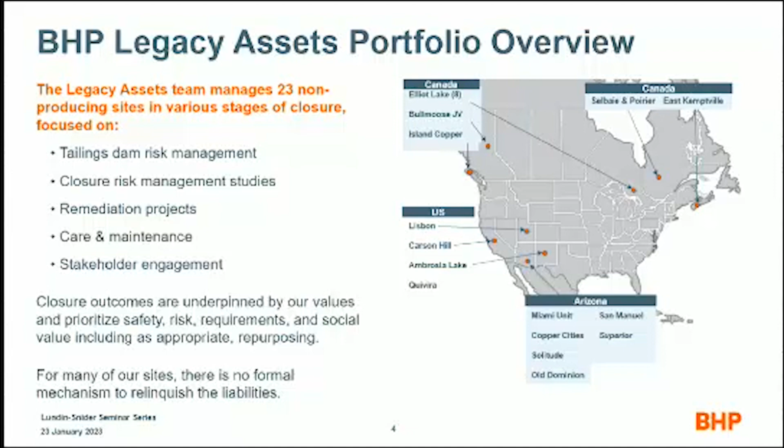This gives you an idea of the expanse of some of BHP's legacy assets. We go coast to coast from the arid southwest of the US. We have sites, you may be familiar with San Manuel Mine or some of the mines in Globe-Miami. We operate some of those. We also have sites in northern Ontario, in Elliot Lake, where we've got a lot of water to deal with.

So we've got different environments that we're working in, as well as different climatic settings, ecosystems, hydrologic settings, and regulatory jurisdictions. Regulations for mining in Arizona look very different than regulations for mining in Canada. And regulations for mining uranium look very different than regulations for mining copper. And we're navigating all of these different sites and trying to do the right thing.

They are also in varying stages of closure. Some of our sites were closed 20 years ago in what was at the time considered world-class closure. There have been multiple learnings that we've shared in the past around these sites and the success stories. We haven't always shared some of our lessons learned, and I'm going to do a little bit of that today. We also have sites that, while we're managing the potential for contamination and the geotechnical risks, haven't necessarily been closed at all. We haven't taken closure activities.

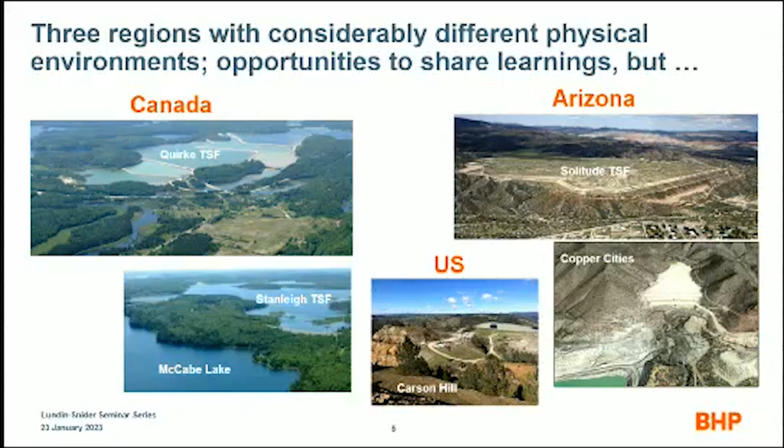Speaking of water, so in the past, closure in the mining industry has really been around meeting regulatory requirements. What's the minimum level of stuff that we can do to meet the regulatory requirements, keep everybody happy for the lowest cost?

And looking at closure from a discounted value. You start a mine, you say, oh, closure is going to happen in 100 years. The net present value of that is nothing. I can do whatever I want at closure. It doesn't matter. Trying to change that narrative and say, we as legacy assets aren't operating 100 years down the road. We're operating now. So all of that stuff that people wrote off as NPV 20, 30 years ago, we're having to manage now. And how do you take those lessons that we're learning and take them back into operations and lower those costs?

The next step in closure maturity, away from just meeting regulatory requirements, is managing risk. How can we do closure to manage risk in the right way? We have over 50 what BHP calls material risks within legacy assets, and they can be split into several categories. We deal with risks around water, tailings, covers, communities, soil, infrastructure, fall of ground, tailings facilities, all of that stuff.

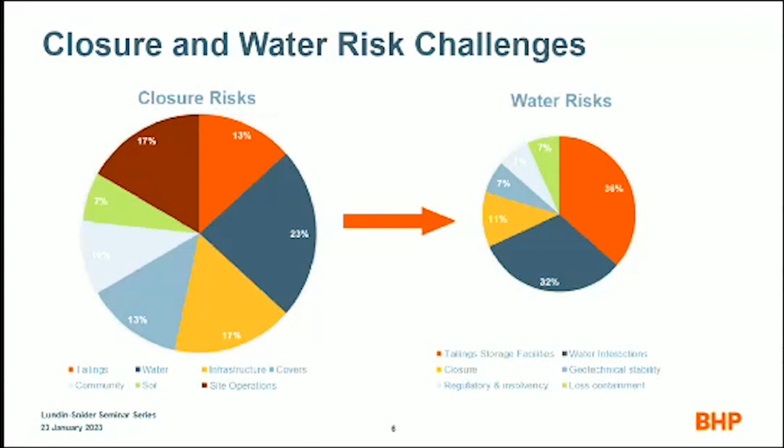As we progress through closure maturity, we would like to change that conversation so that it's not just about managing risk at our sites, but how are we also adding value? And maybe that's not an economic value. Instead, we're looking at positive contributions through things like environment. How can we use our closed sites to increase the biodiversity in areas? How can we use tailings facilities to contribute to decarbonization and carbon sequestration? How can we provide a benefit or a social value to the community so that they can go out and do something with these sites at the end of their life? So we're not just looking at these as a cost to the company, we're looking at them as a benefit, just not necessarily a hard cash benefit.

So today, BHP is focused on achieving optimized closure outcomes on a fit-for-purpose, site-by-site basis. We've got a lot of competing interests. We've got obligations, BHP's value commitments, partner and stakeholder expectations, and of course there's cost, right? We always have to consider cost because we are a mining company. We're looking at how to grow and change our closure as new knowledge comes in, bringing a wide array of subject matter experts into the closure planning process, and then make closure decisions based on BHP's appetite for risk and their appetite for contribution to social value.

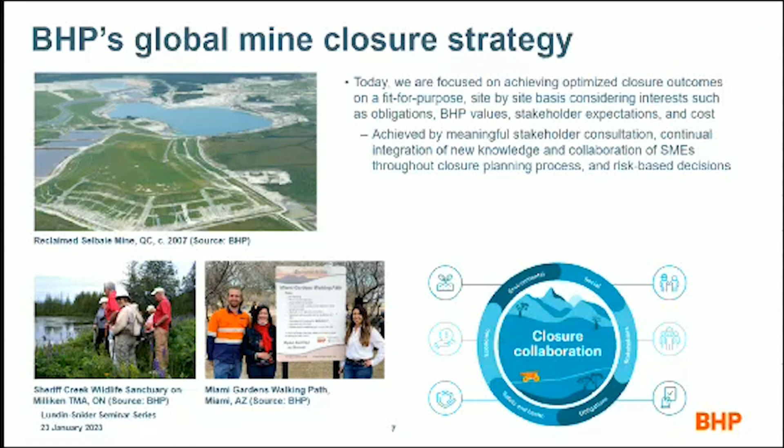A couple of change stories before we get into the lessons learned. This gets back to how things have been managed in the past, and as new things come to light, how we change. For sites in long-term care, we need to be great managers of change because it will come to us. So we have to adapt for changing climatic conditions, events like tailings dam failures that bring refinements to best practices, changes in best practice for closure, stability, geochemistry, fate and transport modeling. And with a large legacy assets portfolio, we're working to prioritize what's required, decide where the greatest risks lie and how to manage those risks at our sites.

These are a couple of examples of things that we've done in the last little while. The Miami Avenue tailings facility was in Globe-Miami, Arizona. It was legacy assets' only extreme consequence tailings facility. It was a very small one. It was only operated for 2 years, from 1920 to 1921.

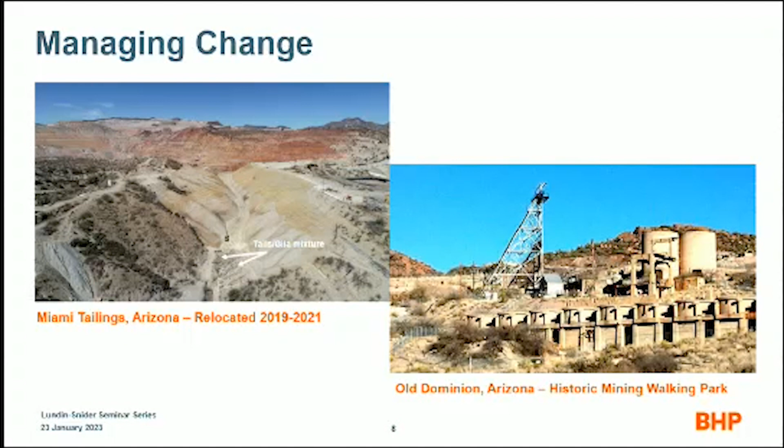So, common attributes of varying closure outcomes. What makes for good outcomes and what makes for not as good outcomes? As we optimized development and closure of some sites in the past, we've not necessarily come to the right decisions in terms of post-operation life, when we apply a modern set of optics, right? So with the value of hindsight, I'm going to present a couple of examples of some good closure outcomes and some not so good closure outcomes.

The good outcomes tend to have focused on long-term thinking, robust science, good stakeholder engagement, and we generally have greater success when we trial and evaluate design concepts in the field prior to full implementation. Poor outcomes have resulted from trying to achieve short-term goals of regulatory compliance, lack of consideration for site-specific conditions, particularly climatic and hydrogeologic setting, and isolated decision-making. Decision-making in a silo, where you're only looking at one piece of the puzzle, so it's inconsistent with the desires or values of other parts of the business or external communities.

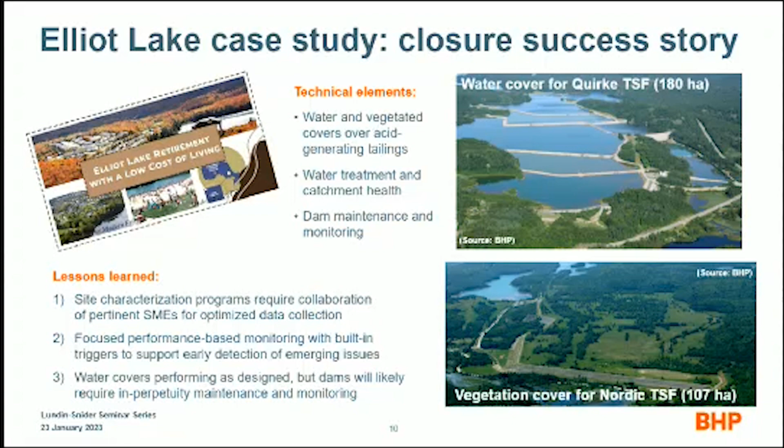And then this is a site that didn't have so good a story as Elliot Lake. As a little bit of background, this is our Selbaie Mine site in northwestern Quebec. It's about 130 kilometers from the nearest community, so this one's an effort to get to. It is kind of out in the middle of the bush. It's very cold.

Semi-humid. They've said relatively cold here, but for Tucson, it's very cold. They've got an average temperature of 0 degrees Celsius, so yeah, I'm gonna go with cold. They get 850 millimeters of precipitation and 590 millimeters of evaporation.

Selbaie was a surface and underground copper zinc mine that operated from 1981 to 2004. The site development included an open pit, 18 million meters cubed of potentially acid-generating tailings stored in an unlined above-ground facility, and 16 million cubic meters of potentially acid-generating waste rock that was also stored in an unlined above-ground facility.

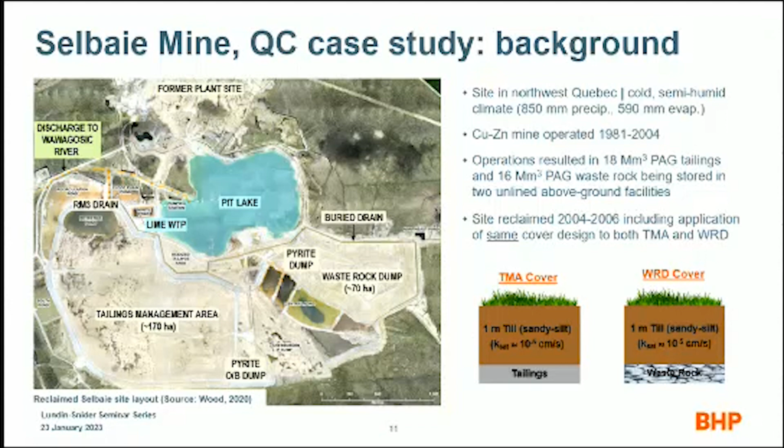From a cover perspective, there's a couple of different issues here. The local till material was too permeable to act as an effective hydraulic barrier, and the same cover was used for both facilities with different design objectives. One was to prevent infiltration, and one was to allow infiltration into the mass. So you're not looking at actual site-specific, facility-specific design objectives.

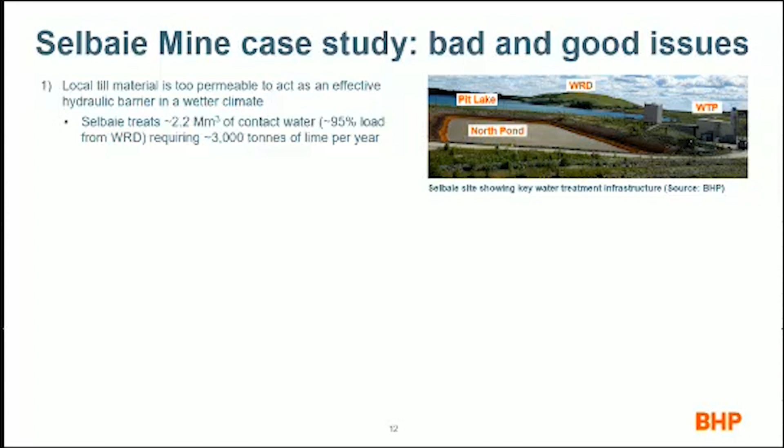Well, guess what? We currently have a lot of acid seepage emanating from the waste rock pile. On average, we treat about 2.2 million meters cubed of contact water, requiring 3,000 tons of lime per year to be shipped to the site. The lime that's used to treat the water at Selbaie comes from more than an 8-hour drive away in our Elliot Lake sites. So it is a substantial addition and operating issue for us.

Once the water is treated, it's directed into the pit lake for polishing prior to discharge to the environment. The good news is that the pit lake has 300 years worth of sludge storage. The bad news is that without remedial measures to stop the acid generation of the waste rock dump, we could potentially be treating water for the next 800 years.

The second issue with the waste rock dump is that the landform wasn't thought through. There is a flat plateau on the top that does not actually shed water well. Instead of shedding water via the landform, they shed water to drainages, chimney drains essentially, that were built into the waste rock dump cover, and then shed down into a buried pipe system.

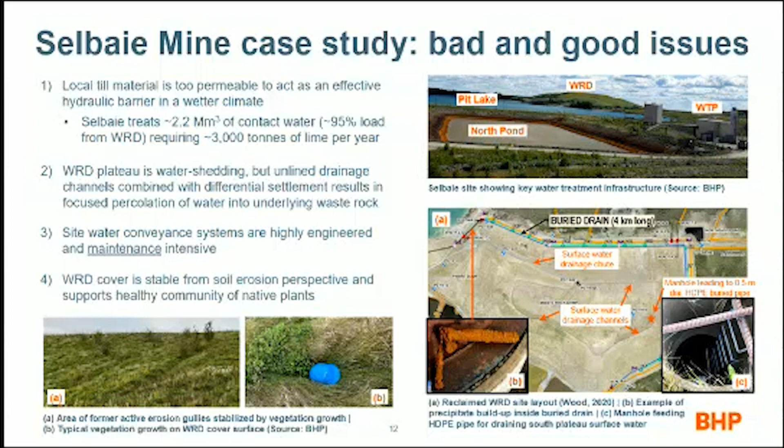One good aspect of the reclaimed waste rock pile is that while the cover was initially prone to rilling and gullying, the coarse fraction of the till material combined with the root mass of the native grasses has worked to stabilize the cover surface. So we're not getting a lot of rilling or erosion. We've got very good establishment of vegetation on top of the waste rock dump. So it did the job of at least stopping surface water from contacting the potentially acid-generating species.

We are starting to get woody species beginning to naturally colonize the surface, particularly where we have water ponding on the surface of the facility.

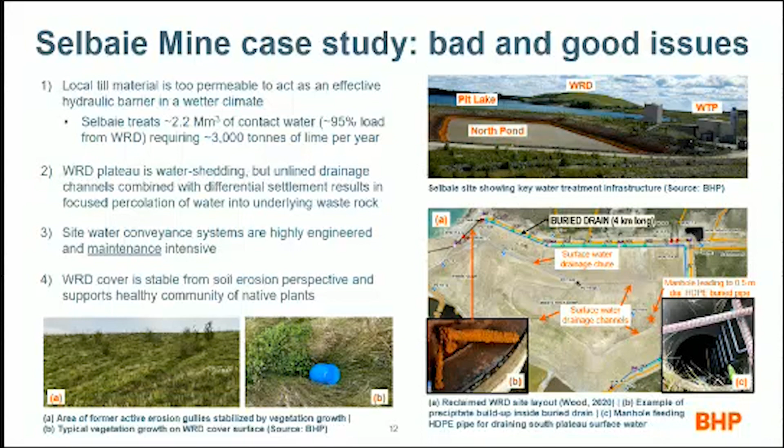So, some lessons learned about Selbaie. From a cover design perspective, there are a couple of issues. Anyway, moving on, sorry. We've learned a couple of lessons from Selbaie over the last 15 years of post-closure care and maintenance, and of course, hindsight's always 20/20. But what could have been done different 20 years ago when this closure was constructed?

Number one, there's a potential for the plateau runoff, the landform, to look differently, to shed water better, and not to rely on chimney drains and other types of conveyance that are prone to blockage and precipitation and percolation. There's always an issue whenever you're working with high TDS solutions of precipitation, or even non-high TDS solutions.

Whenever you're building something that's buried, don't rely on it staying open. I think that is one of the biggest messages; it will require ongoing, constant maintenance. If you can design something that cannot be blocked, rely on that for conveyance of solutions.

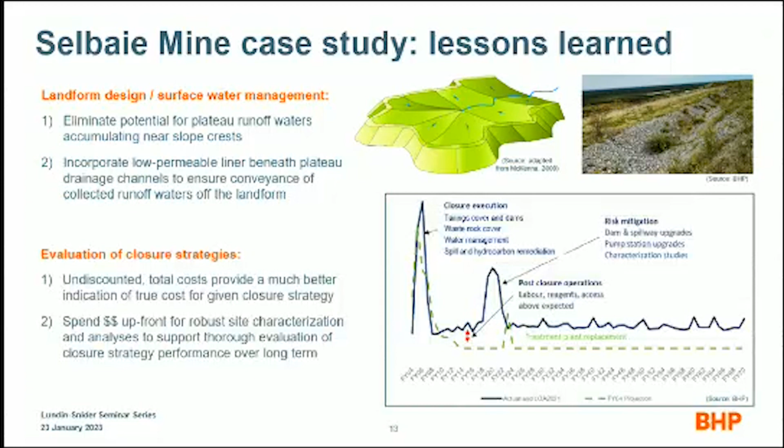When we go to the effort of shedding incident precipitation off of a flat plateau, we want to make sure that the diverted water is conveyed off the landform in a way that minimizes the potential for this water infiltrating and percolating through the cover.

This is an interesting graph here. This shows relative closure costs at Selbaie over time. The green dashed line was the original projection of relative costs. You can see the initial construction in 2004 here. The blue line is our updated actual closure costs. A few years into closure, we had to bring on-site workforce to manage the site.

We had to increase our lime usage and do upgrades to the water treatment plant to streamline some of that. That increased our reclosure, risk mitigation, as well as doubling our operating costs at the site. To put things a little bit into perspective, which is super interesting about this site, if you look at this in relation to the revenue made at the Selbaie Mine, the original closure cost was 17% of the revenue of the mine. The updated closure costs are 36% of the revenue that was made.

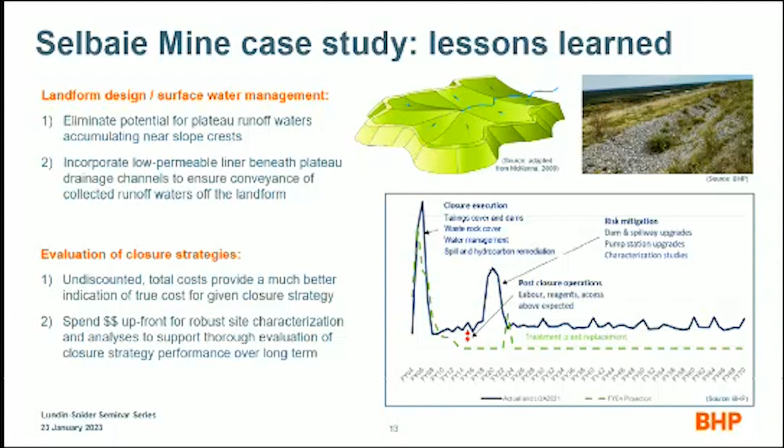Now we're going to talk about a case study at one of our sites in Lisbon, Utah. This one involves the impacts to groundwater from 2 unlined tailings facilities at a former uranium mill site outside La Sal, Utah. The Lisbon site produced uranium from 1972 to 1989, as a lot of these uranium sites did, right at the high point of the uranium boom. It was reclaimed in the 1990s. One unfortunate aspect of this TSF is that it was sited on both a surface and groundwater divide.

Impacts to groundwater were detected in the 70s. At the time, hey, we need uranium. It was okay; we were doing this to supply the Department of Energy with the uranium they wanted. I shouldn't say we; this is one of BHP's acquisitions as well. A groundwater corrective action plan was put in place that comprised pumping and treating of the water.

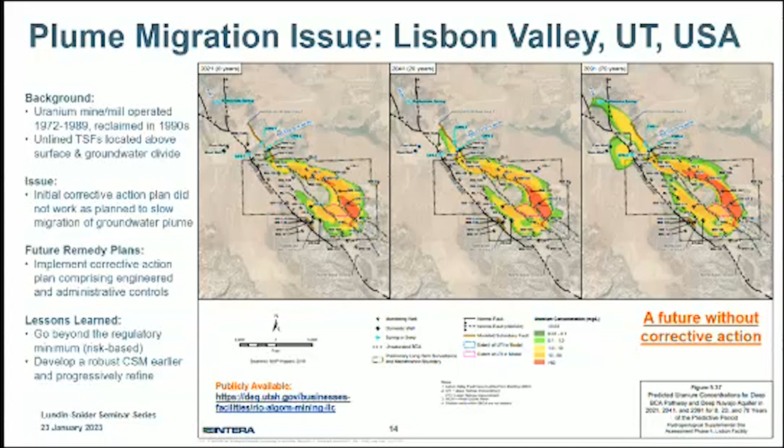Like I said, it's right outside of Angels Camp, California, in the upper foothills of the Central Sierra Nevada mountain range. It's got hot, dry summers, very wet right now. At this site, last I talked to them, which was about a week ago, they had 18 inches of rain since November. So it can be very wet in the wintertime.

In 1986, the Carson Hill Gold Mining Company, owned by Western Mining, began operations in an open pit side cut to access the ore for heap leaching of the gold using cyanide extraction technology. The operation resulted in construction of 4 waste rock piles and 3 heap leach pads that are now referred to as waste management units. The open pit mining and heap leaching operations ceased in October of 1989. The leach pads were rinsed to remove cyanide and other constituents of concern. And the waste rock piles were regraded and revegetated concurrently with mining and were considered stable and reclaimed at the end of mining. The California Regional Water Quality Control Board approved closure of the waste management units as Group C mining waste. Between 1992 and 1994, the site was closed in accordance with an approved closure plan.

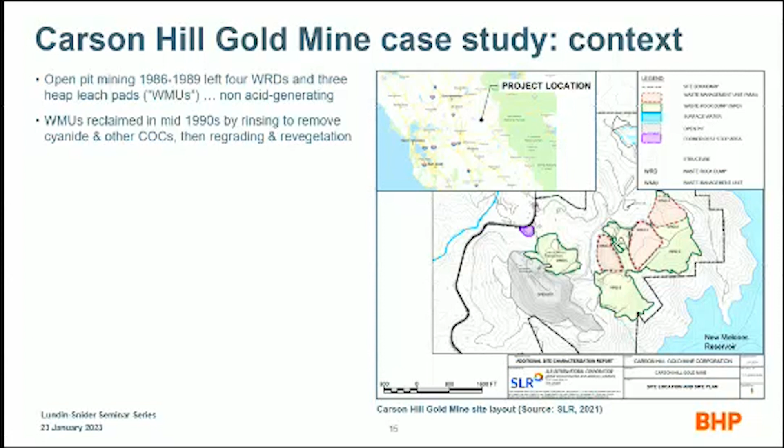In 1996, a third party purchased the closed property from Western Mining. We're closed, we can hand this over, it's all good. To operate the site as Carson Hill Rock Products. The operations included mining of spent ore from the waste management units and the rock from the open pit, and creating a commercial rock crushing, screening, and aggregate washing plant. As part of the 1996 purchase and sale agreement, Western Mining retained final closure and environmental liability responsibilities for the property. That's a key statement there. And then BHP acquired Carson Hill through acquisition of Western Mining Company.

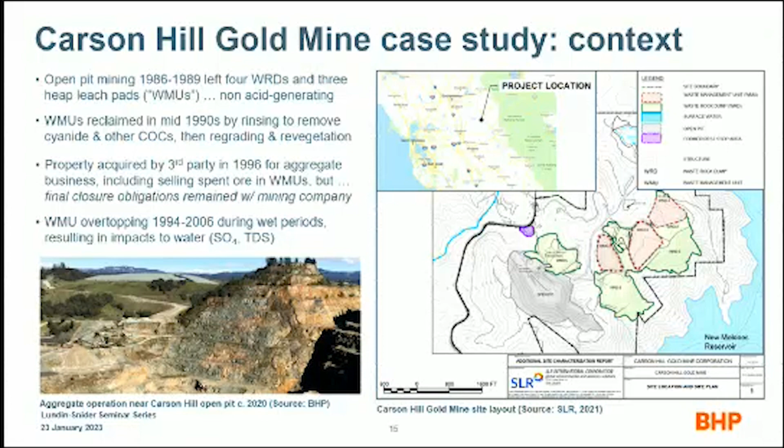Infiltration of rainwater through the vegetative covers on the WMUs resulted in periodic overtopping between 1994 and 2000, and again in 2006. Waters from the waste management units flow into the surrounding waste piles and native rock materials, impacting water quality with elevated concentrations of TDS, sulfate, cyanide, nitrate, and certain other metals. Although the closure of the heap leach pads was approved by the relevant regulatory authorities in the early 1990s, the Water Board concluded in 2005 that groundwater at the site did not meet applicable standards and required implementation of certain corrective actions.

Based on the classification of the WMUs as waste material, Western Mining was permitted to simply regrade and revegetate the heap leach pads. But given the local climatic conditions and the fact that WMUs were underlain by a double-lined system, it was only a matter of time before the bathtubs underneath the heap leach pads filled up and overtopped again.

In short, the original regulatory and approved mine closure plan for Carson Hill failed and required BHP to develop and implement a new closure plan through regulatory orders in the mid-2000s. BHP has been collecting and treating water at the site since 2007, as well as maintaining interim geosynthetic liners on the WMUs. However, we weren't able to do any other closure of the sites because we didn't own the site.

Carson Hill Rock Products owned the site. We only own the environmental liabilities and closure liabilities. So we couldn't reduce the water that we had to treat. We had to allow Carson Hill Rock Products to continue mining the WMUs in a way that suited them.

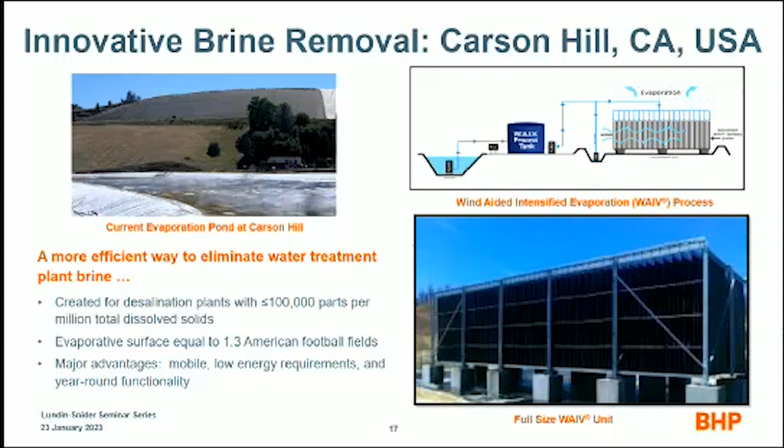Water testing indicates low operating cost and a simplified evaporite management. Potential for year-round evaporation. Well, maybe not when they're getting 18 inches of rain out there, but you know, in a normal winter. Maybe not when they've got an atmospheric river coming at them. And a modular design that can be expanded or moved around the site. Further analysis is ongoing to see if we can incorporate this into our current treatment ways out there.

Now this is a super interesting one. This is some innovative water treatment that was undertaken at our Island Copper site on Vancouver Island. Island Copper was an open pit copper mine that was operated between 1971 and 1995, produced copper and molybdenum concentrate. After 24 years of ore extraction, the site was closed and reclaimed. A large volume of contact water required long-term collection and treatment.

So upon closure, the open pit was flooded with seawater and then capped with a layer of fresh water from a nearby river. This resulted in the formation of three layers of water of different salinities within the pit, which are maintained due to their unique densities. I might have to rely more on my notes for this one because I don't always understand the science of this, but the layered structure is used to manage and remove metals from the acidic drainage that seeps from the nearby waste rock dumps into the pit.

The treatment of the water in the pit lake is achieved through a biological process of phytoremediation. A low-cost liquid fertilizer is added to the top water layer of the lake year-round. The fertilizer promotes growth of phytoplankton cells, which bond with the metals and then sink to the bottom. The treated water that complies with regulatory standards flows to the top. So there's a middle layer that sits in there, which is where the plankton work. The bad stuff drops to the bottom and the good stuff goes up. That's the simplified version. I'm not much of a biogeochemist, so.

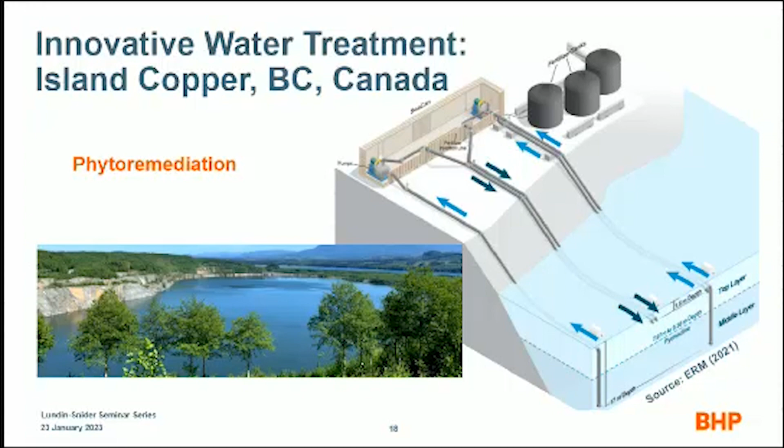But it was pretty innovative at the time that it was installed, and it's still working today. It works very well today. There's been some improvements as far as the system that adds the fertilizer to the system. But it is still operating 20 years later and operating very well.

And this one's a little close to home. This one's at our deep pit in Copper Cities. It's not innovative, but it's an innovative way of thinking. So we've got a lot of very low pH, very high TDS water that sits in some of these pits. Instead of just treating these and discharging them or evaporating, which again, in a water-stressed environment of southern Arizona, is evaporation the best way to be managing our water? Can we extract value from the water to then take that and pay for closure or for different solutions there?

We're currently undertaking some trials to evaluate the potential viability of extracting valuable minerals such as copper from our pit lakes, such as the deep pit in Arizona. Techniques to recover the copper, we're looking at, again, technologies that have been around forever. Can we just use scrap iron? Can we send this through an SX-EW? As well as innovative technologies to retrieve the metals. We're hoping that our team will have a chance to generate some revenue for the business while using that to institute some of the closure outcomes and things that we would like to achieve.

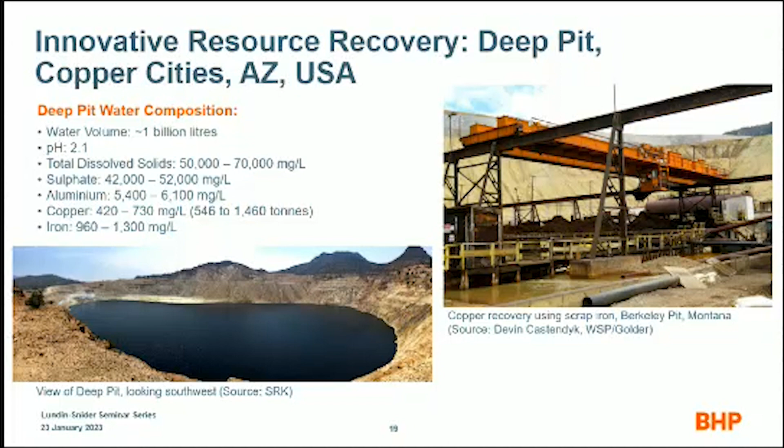And then, some lessons learned. To summarize, based on our experience over the decades of stewarding the 23 sites, regulatory compliance isn't enough. I think you've heard that a couple of times through here. Rules change, science improves, society demands more. Be risk-based rather than compliance-driven. And if you can add social value and show the value of your sites, tack that on too.

Consider the forever case throughout the mine life cycle. Relinquishment, based on our experience, is rarely realized. Consider the full cost as opposed to discounted net present value. Again, it may look good to you, but to the person who's left managing that site, and the business 20 years down the line, it's not going to look good.

Identify potential closure material risks early on. The earlier you can identify the risk, the easier it is to manage. If you can manage that closure risk during operations, do that. Thinking outside the box can lead to some innovative solutions. And I can keep going.

I've got a little bit of time left. I'm just going to go through these really quickly. So if we shift gears and talk about some stakeholder engagement that we've done. It's essential to coming up with a good closure plan, right? To showing the value, to having something that we can pass on to the site.

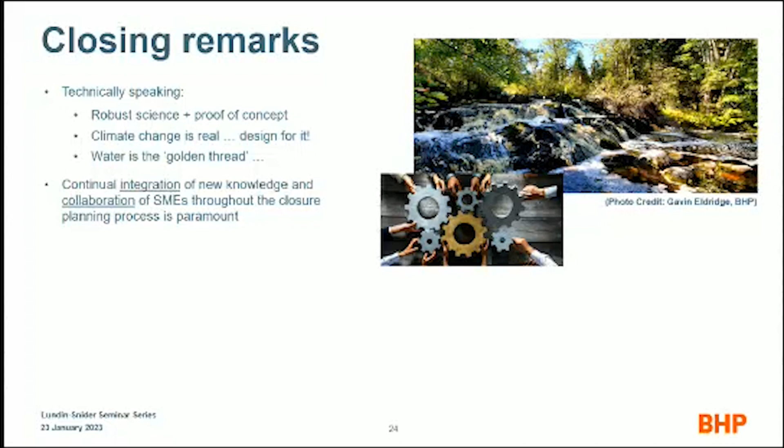Continual integration of knowledge and collaboration with SMEs early and often is what we're talking about whenever we talk about collaboration and knowledge sharing. And work with internal and external stakeholders. While relinquishment is a great aspiration of our mine sites, we should develop a plan for each domain and carry out investigations assuming that we're going to be stuck with these sites forever, for a very long time.

We have far greater chance of relinquishing properties if we make our decisions risk-informed. We can reduce the amount of operations that's required to maintain those facilities. You're going to have much greater chance of relinquishment. Maybe not in the U.S. I still don't think we're ever going to relinquish anything in the U.S., but in different environments.

When evaluating different closure strategies for the site from a cost perspective, undiscounted total closure cost provides a better assessment of total dollars projected to be spent over the life of the asset. If we select closure strategies based on NPV, we are going to favor strategies that offer the least opportunities to build social value and manage our risk, leaving the site and the owner exposed during the post-closure life of the facility. And lastly, we've learned that opportunities for building social value dramatically increase when trailing environmental liabilities are robustly addressed.